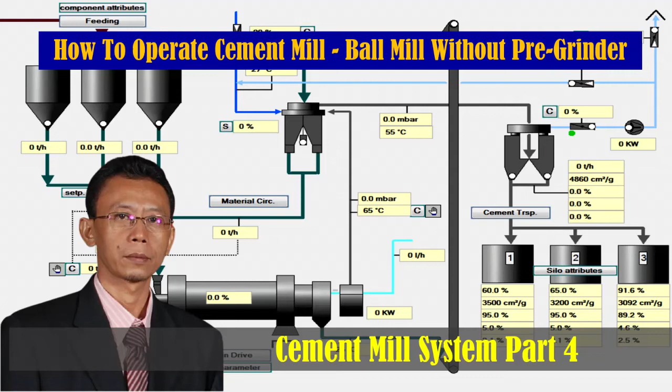In this session I will explain how to operate a ball mill cement milling system without pre-grinder. Before operating the cement milling process using this ball mill, we must first understand the buttons to start or stop the group of equipment used to control operations in the cement mill system.

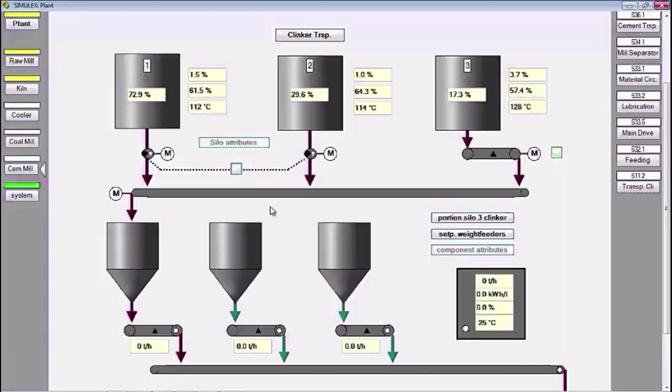We are preparing to operate the ball mill in cement grinding. The first thing we do is fill the clinker into the hopper, which can be taken from Silo 1, Silo 2 and Silo 3. Clinker from Silo 1 and Silo 2 has the same quality, with free lime below 1.5%, while clinker from Silo 3 is underburned, whose quality is outside the standard, or free lime is above 1.5%.

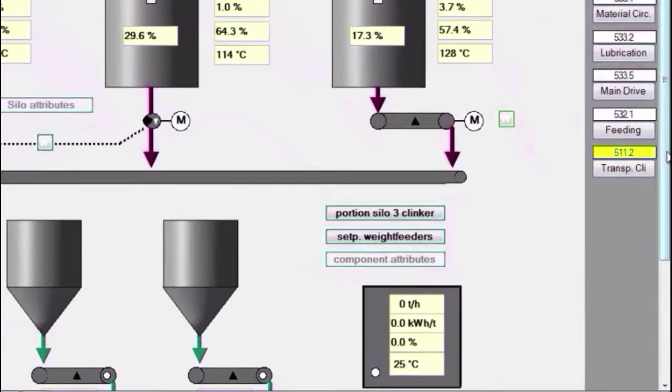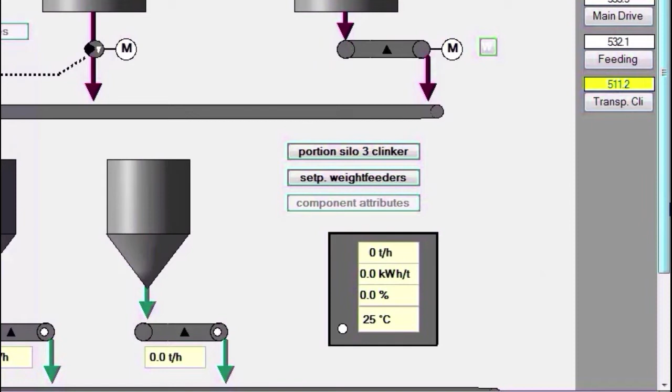Alright. Let's do the filling of the clinker hopper before starting the other equipment. We click on the clinker transport group, then start it for filling the clinker hopper. Meanwhile, the filling of the gypsum hopper and additive hopper is carried out by field operators.

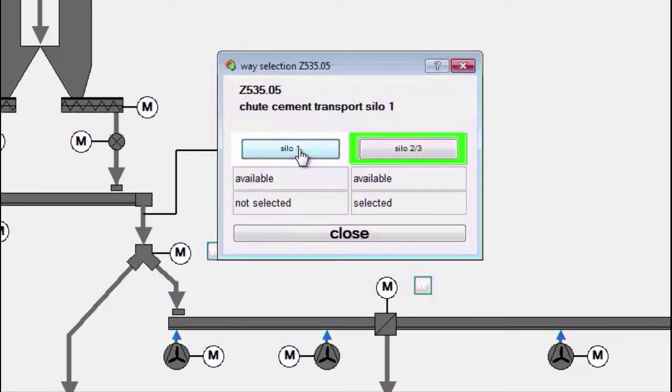After filling the clinker, we start the cement product transport group. This cement product transport consists of the screw conveyor under the dust collector, air slide, then bucket elevator, which is not shown in this simulator. Then cement product is put into Silo 1 or Silo 2 and Silo 3, by selecting the selection button to Silo 1 or to Silo 2 and Silo 3.

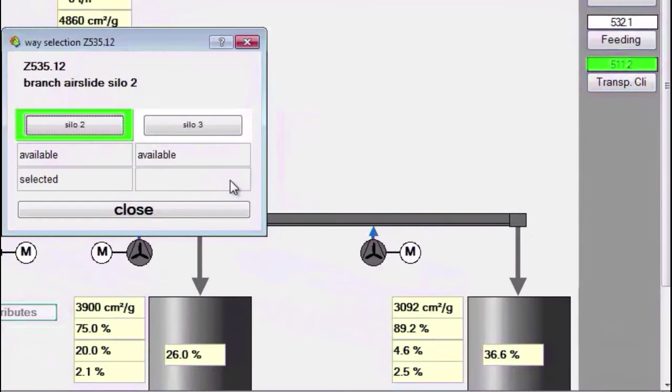We start the cement transport group, we click on the group then we start. The cement product according to the selection goes to Silo 2. After all transport equipment from the top cement silo, air slide and screw conveyor runs, it means that all indicators are green.

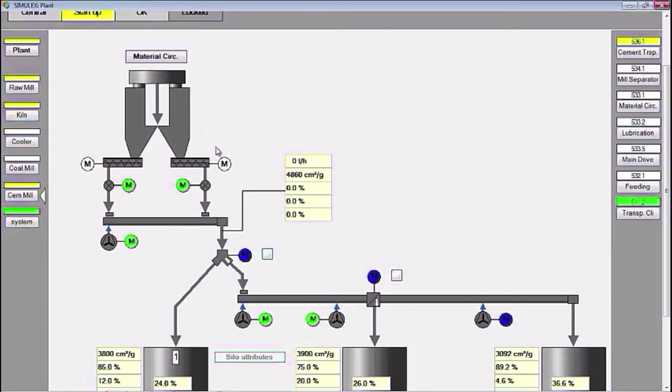Next, we start the mill separator group. This mill separator group consists of mill ID fan, dust collector and separator. We click the group and we start. The first thing to start is the mill ID fan. After the mill ID fan is running, all dampers are green or ready to be opened and closed.

Here there is a damper leading to the chimney, whose opening can be adjusted, then this is a circulation damper, whose function is to help regulate the air intake from the separator and the mill outlet draft. If the circulation damper is opened too large, the mill outlet draft will decrease, and vice versa.

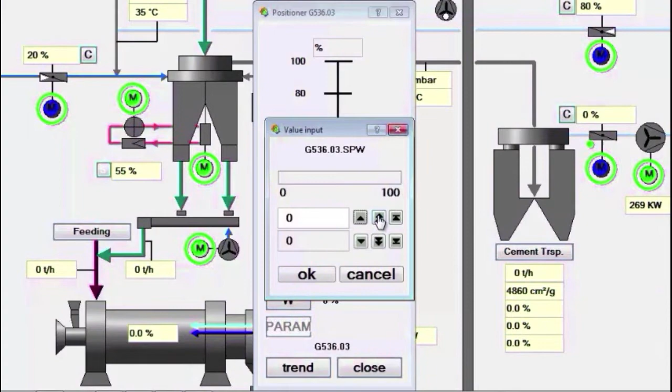Because the mill separator group is already running, we first open the mill ID fan damper 50%, and for the separator speed we set 60%. Mill outlet draft at the start is maintained between 5 to 6 millibars, and during normal operation it will be maintained at around 11 millibars.

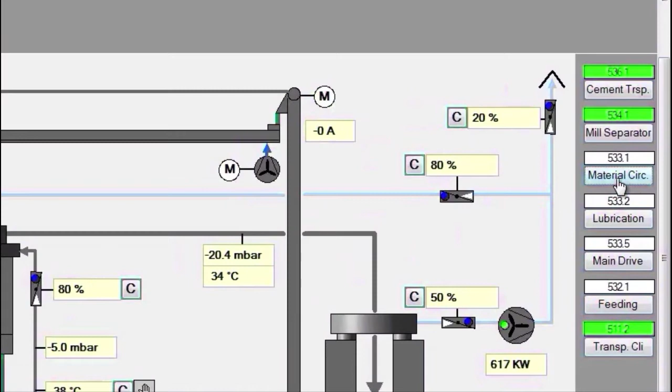Next, we start the material circulation group. This material circulation consists of the air slide leading to the separator, bucket elevator, and air slide mill outlet leading to the bucket elevator. We start the group.

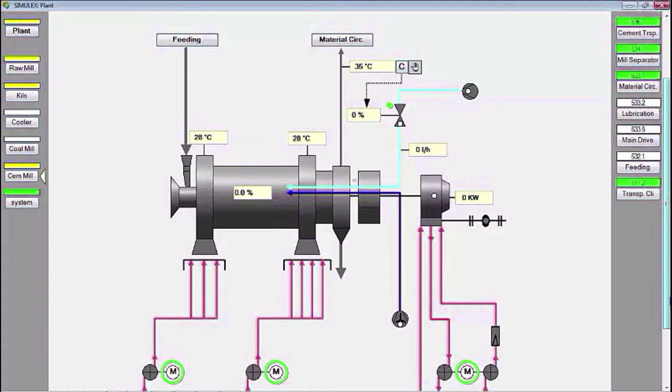Then we start the mill lubrication group. This group consists of oil pumps for shoe bearings or trunnion bearings, oil pumps for gear reducers, and water pumps whose function is to lower the temperature when the cement temperature is high during operation. We start the group, and we wait for the process.

Because this simulation is not equipped with auxiliary drives, to start the mill we directly use the main drive motor. But what needs to be remembered is that to operate a ball mill that uses a 5000 kilowatt or 5 megawatt motor, before starting the mill motor, you must first ask permission from the power station. After getting permission from the power station, then we start the mill main drive.

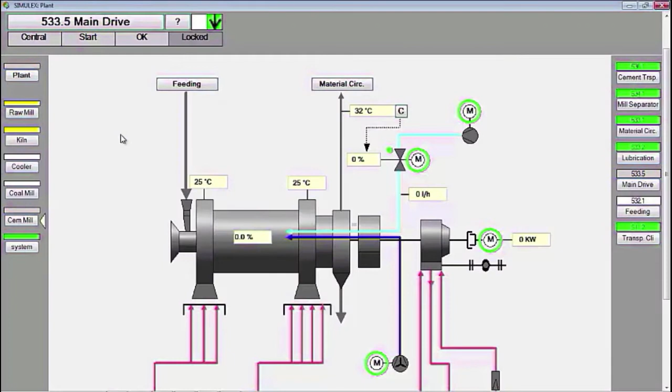We start the group, and we observe the process. The temperature of the trunnion bearing immediately rises, the main drive is running and we wait for normal rotation, then start feeding. Next, we start the feeding group, we click the group, then we start.

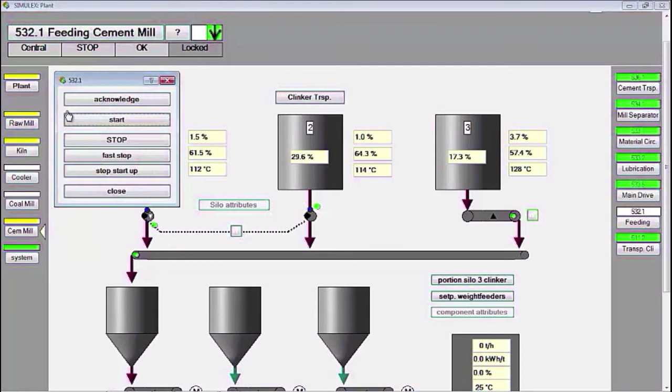Next, we return to the main monitor display to control the operation of the cement mill, which uses a ball mill without a pre-grinder, to perform the initial settings for feeding the material. Because the ball mill in this simulation has a capacity of 200 tons per hour, we do the manual setting of fresh material feeding 200 tons per hour first.

After material feeding is started, we observe the material entering the mill, and we hope that the material in the mill is not too empty or too full. The mill has started to fill up to 29% and continues to rise.

Then, we hope that the material going to the separator will contain tailings material that will return to the mill. Blaine is too high, so we try to add feeding first; it becomes 300 tons per hour, and this is still a manual setting of the total sum feeding. This total sum feeding is the total of feeding and tailings material, and currently we are setting 300 tons per hour. Blaine is currently low.

For producing PCC cement, the Blaine standard is 3800 to 4000 square centimeters per gram of cement. For the proportion of feeding material we have to adjust; currently the clinker material is still 90%. So we have to increase the additive material, which was previously 5%, to around 20%.

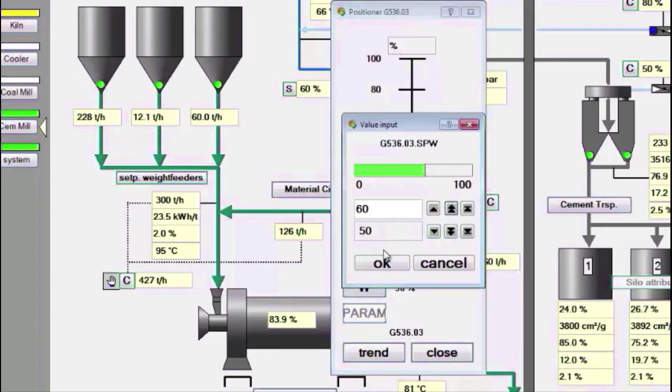The tailings material has started at 132 tons, but Blaine is still 3,500, so we try to increase the draft at the mill outlet. This is 6.9 millibars. We increase the mill ID fan damper opening from 50% to 60%, while we observe the effect on the milling process inside the ball mill. The mill outlet draft is already minus 8 millibars.

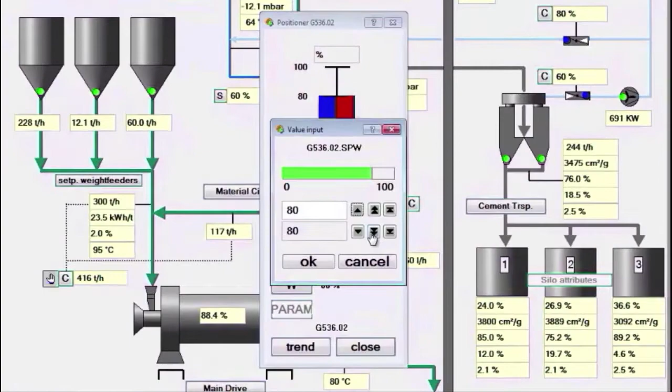We can increase the outlet draft of this mill by reducing the circulation damper opening, which was previously opened at 80%; we lower it to 70%. And we expect the mill outlet draft to be around minus 11 millibars.

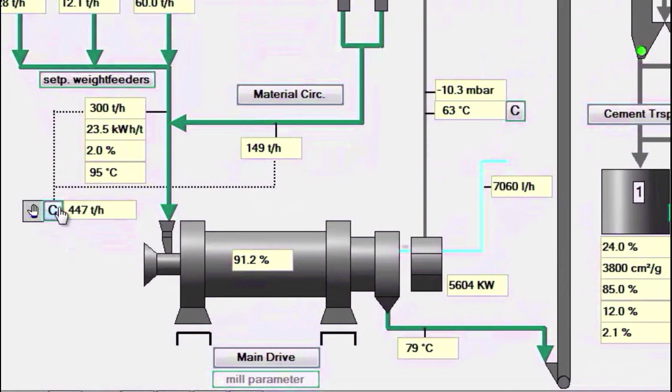The material in the mill is full, so we control it by changing the set point total sum to automatic, and setting feeding to 350 tons per hour, so that the material in the mill is not full.

At the start of the cement production process at the cement mill, the first time we feed using a manual setting, for example a production capacity of 200 tons per hour, we set the manual setting to fresh feed, while the automatic setting is set to the total of tailings material and fresh feed.

Product quality has started to improve; Blaine is already above 3,700, and tailings are around 200 tons per hour. Since Blaine is still 3,700, it should be raised a bit. The material level in the mill has started to drop to normal; the default is 75 to 85%. Because the tailings material has started to decrease, we increased the total feeding from 350 to 380 tons per hour, gradually increasing it to 400 tons per hour.

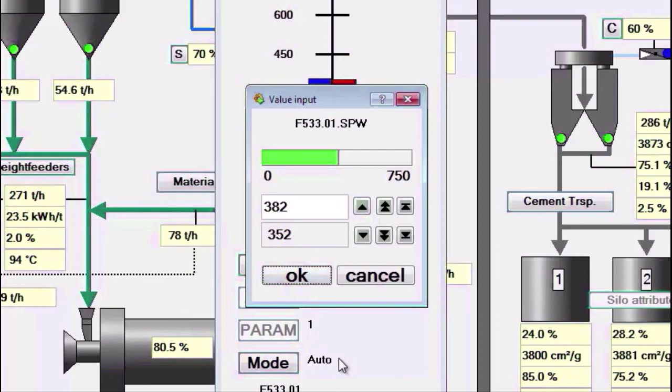With the addition of total sum feeding to 380 tons per hour, the tailings material began to rise slightly, and the product has begun to stabilize. The feeding material and the product material are close to the same. This means the system is right. Blaine is approaching 3,800, but the cement temperature is still low at 72 degrees Celsius. Under normal operating conditions the cement temperature is between 85 to 95 degrees Celsius.

In controlling the operation of this cement mill, it is expected to be optimal, which means that product quality stability can be obtained, and all operating parameters are in a stable condition and do not fluctuate. That was the explanation of the operation of the ball mill that does not use a pre-grinder.

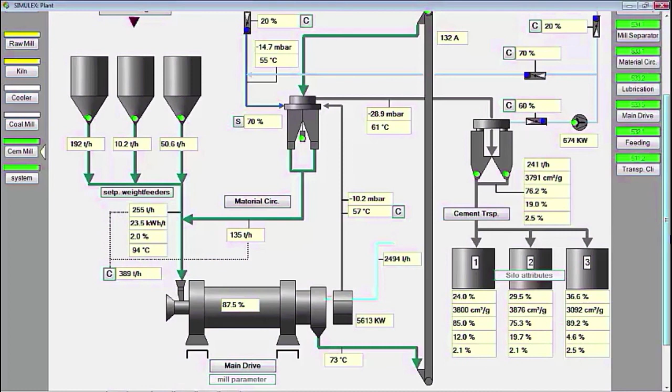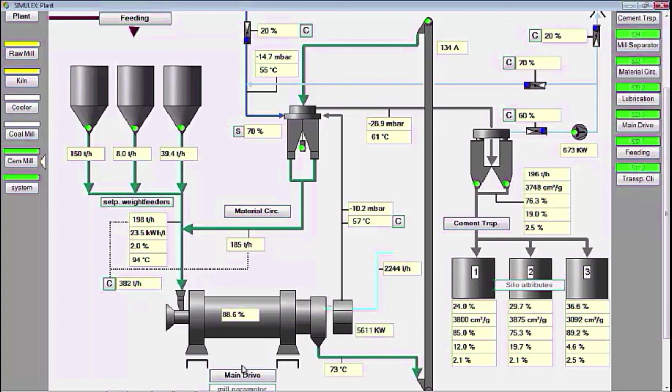When viewed visually, the 45 micron residue cannot be brought below 6%, but Blaine can be achieved according to the standard, meaning that there is something not quite right in this grinding system, for example the composition of the steel balls, the level of grinding media, and the thickness of the mill liner which has started to wear out. For the cement milling process using a ball mill without a pre-grinder, we will finish here. In the next video session we will explain how to operate the cement milling process using a pre-grinder.